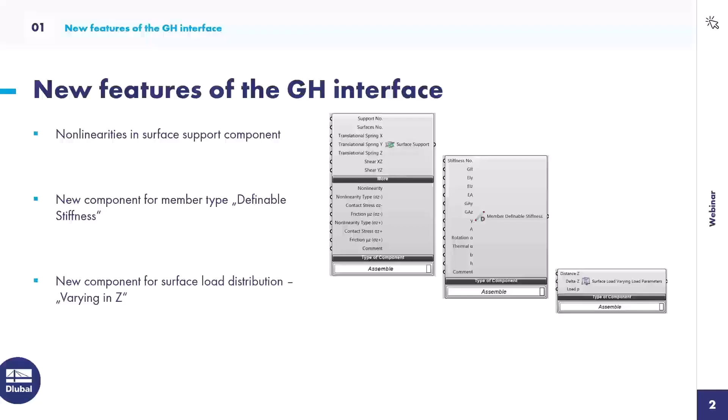The third component is a link to the surface load component. We extended it with load distribution varying in the Z direction, so in case you have to apply a hydrostatic pressure on a vessel, that's the load you can use, because you can insert varying forces in the global Z direction. We also created a new component for rigid links. All of these features were wishes from customers, so we tried to cover them as well as possible.

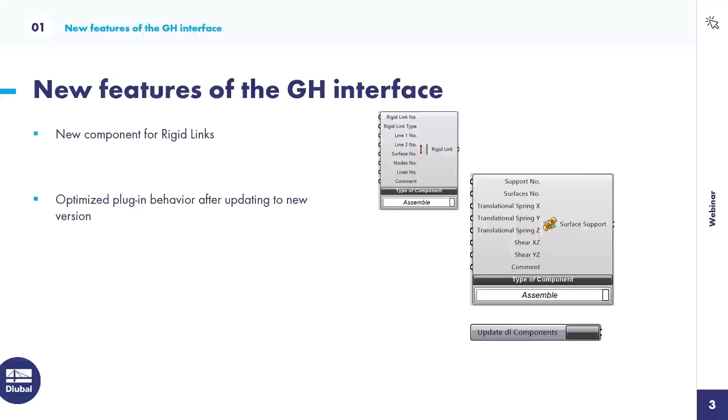The last feature, in my opinion the biggest one and the one I'm personally looking forward to, is an optimized plugin behavior when a new version of the plugin has been installed. This relates to the fact that when you opened an old Grasshopper project with a newer plugin version, it could happen that the connection wires were disconnected, at least for some components. That was caused by the fact that we constantly extend current components and create new ones, and when we extend an existing component, those wires could become disconnected - this new optimized behavior should prevent that.

You get an old tag, you get the previous component shown, you have a new component where you can run an update of the components, and still the wires should remain intact. So that's a good feature for such cases. All right, this will all come in the next days.

Now let's hop into these sample files. Let me introduce them briefly. As I said, we offer those sample files as downloads on the webinar page, so you can download them and use them yourself.

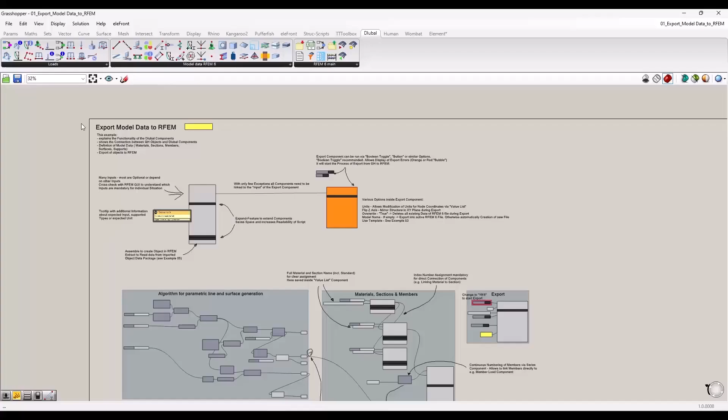As I said, I'm going to start with the export of model data to RFEM. Maybe before we dig into that, a brief introduction of the plugin itself for those who haven't seen it before. You can download our plugin via the Rhino Package Manager. And after the installation, you get a new tab here, the Dlubal tab.

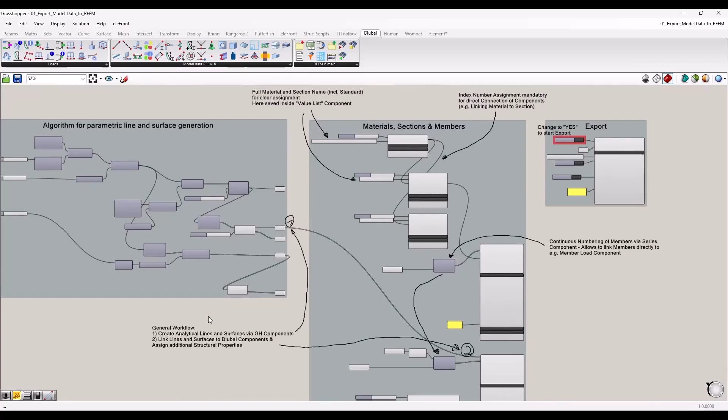And this one is divided into three chapters: the model data components, load data components, and general components. I will focus now on the center group here in this example, and start a little bit with the explanation of how our components are set up, and then also with an example so you can check it, modify it, and so on.

Regarding the introduction of our components, I left some comments in here. In general, our components work similar to other components that you know from Grasshopper. We have inputs, we have outputs, usually just one, depending how you use them.

It depends a bit on your use case, what inputs you have to fill. I can't say you always have to use this and that input. It depends. If you plan to export a tapered member from Grasshopper to RFEM, then you need the Grasshopper line, the section distribution input, section start, and section end, for example. If you plan to export a rigid member, the member type rigid from Grasshopper to RFEM, then you only need the member type input.

So we can't say this is mandatory, this is optional. My tip is check the RFEM graphical user interface, what is requested there from you, from the user, and then fill the same inputs in Grasshopper.

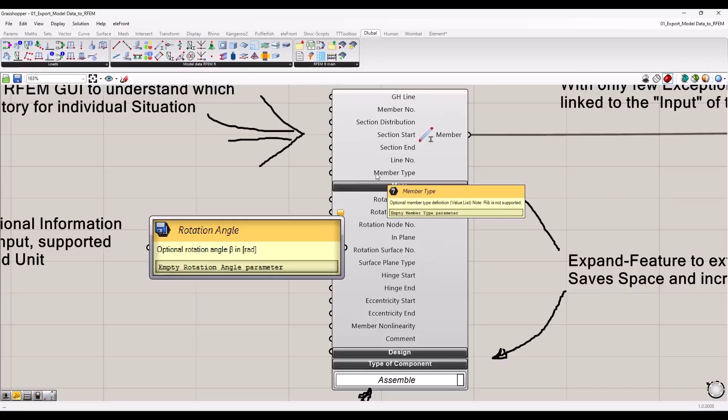We try to give you additional help via the tooltip. So whenever you hover with your mouse over an input, you get additional information. Those tooltips contain information about the expected input, supported types, expected units.

For example, for the member type, you could argue what is a member type, what's the proper input for that, a string, a value, and then you can see here value list in the tooltip. So you can call up a value list, a very often used feature for our interface, for our plugin components. It will give you the list of options, and then you can simply select the one that you need.

For the rotation angle, for example, you get an information about the unit. So also check the tooltips as a quick help if you are not sure how to deal with certain input.

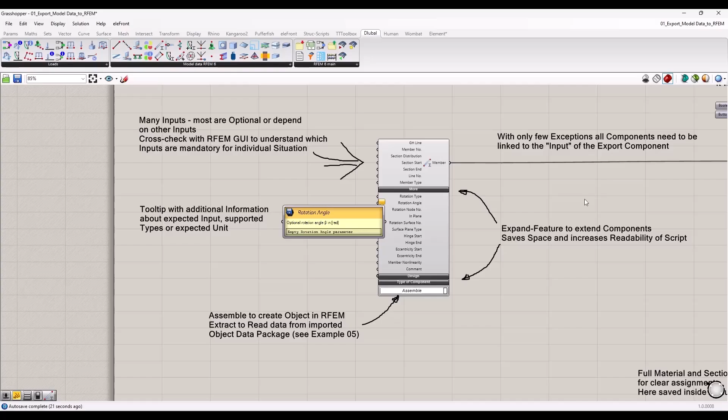We have also an expand and shrink option in our component. Here we have to say thank you to Bollinger Grohmann, Diego Apellániz. They provided us with this code. It's really appreciated and a nice feature because it reduces the space of the components if you only need some of the inputs. It's simply a nice feature.

Concerning the general setup of an export of a script that has the target to export data, you would create multiple components. I have here one for members. You would need additional components probably for sections, for materials, maybe for nodal supports. You fill them with the information, and all of those components then have to be collected inside the RFEM export component. That's this one here.

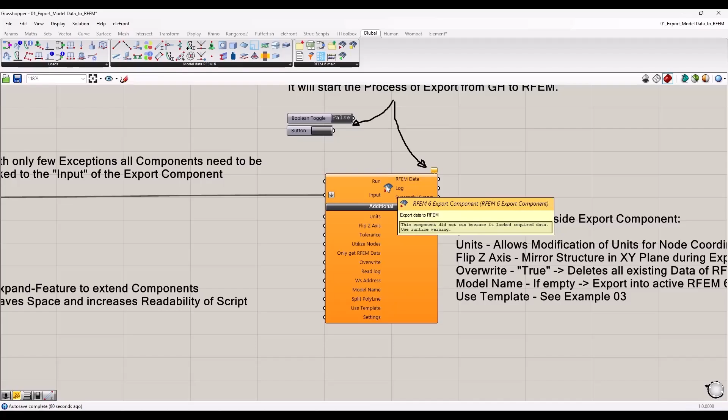All of the components are connected to the input, and then you can run the export by a Boolean toggle, a button, or similar options, which you connect to the run input. My suggestion is using Boolean toggle.

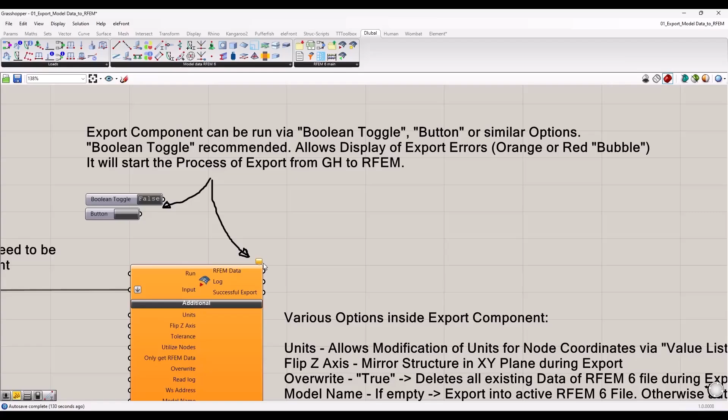It has two pros. Basically, if you keep it true when you connect it, then you have kind of a live link. So whenever you change something, the export will be triggered again, and you get the result in RFEM directly. And the other big pro is that when you made an error in the input somewhere in your script, and you leave it on true, you usually get a red or an orange bubble, as you can see here, and this one contains an error message. If you use the button, this error message will disappear in a millisecond after it showed up. So that's why I prefer Boolean toggle.

So far regarding a quick introduction of the components.

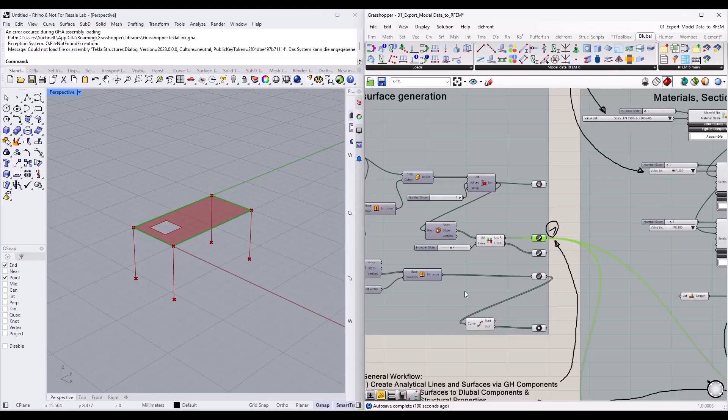Now let's take a look at this little example down here. Let me show what I did. I have here a group representing native Grasshopper components, basic components in the Grasshopper program. I created a little structure, a couple of columns, a slab with an opening, and I collect all these objects in surface, curve, and node or point components. I'll use these lines, surfaces, or objects later in my Dlubal components, and I'll show how in a second.

If you take a look at the member component, it makes sense to use the lines we created via Grasshopper as the analytical line, basically start node and end node. So what I'm doing is connecting this curve component with the member component, with the Grasshopper line input.

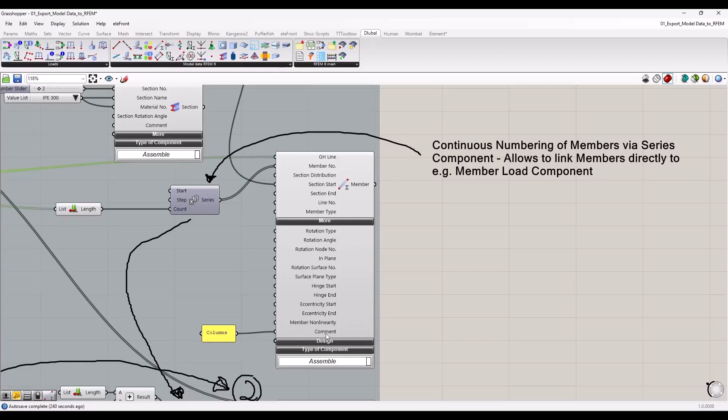Then you have additional inputs to assign the required and necessary information. What section do you want to assign onto that line? Maybe you want to assign additional comments or even eccentricities. That can be done via direct inputs or additional components.

I also create a material and a couple of sections in this example. We often get the question, will you provide a library for materials and sections as a component? We actually decided against that. The library in RFEM contains hundreds or thousands of materials and sections, so we don't see the point of having such a component in Grasshopper. It's quite easy to create your own little library.

I'm using a value list in this example. You can edit the value list - let me use this one, that's better. You fill in the short name that you want to see when you open the drop down, and then the full name expected by RFEM. The full name usually contains also the standard. If you document it that way, you have a nice little library where you can choose the materials that you frequently use.

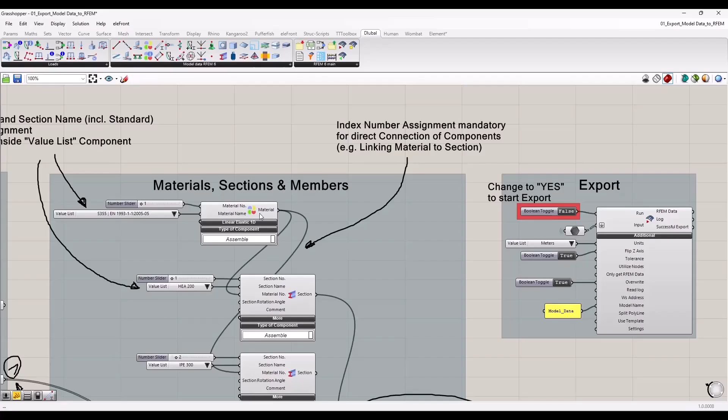Small tips like that are mentioned in these sample files. An important piece of information is also shown here. In my webinars about the Grasshopper interface, I usually connect my components directly, material into the section component, because in a section the material index number is a required input. So it's just logical to connect them.

This connection, however, only works if you assign the index number to the material, because the input expects a value 1, 2, 3, 4, 5 - the index number of the material. This information can only be shared if it's assigned beforehand. That's important - keep an eye on the index numbers of the components.

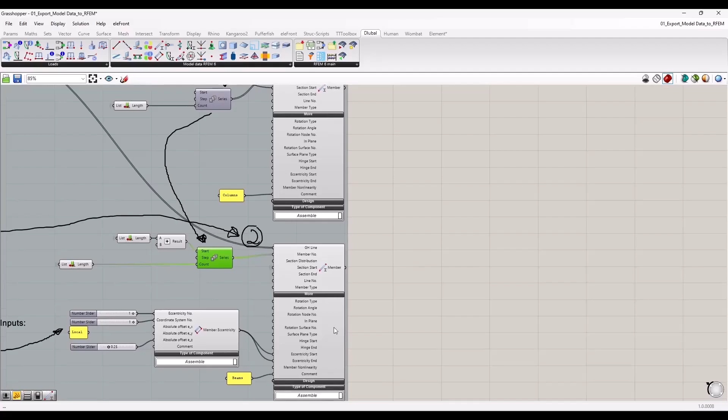It's not that difficult, even if you think about members where you have maybe hundreds or thousands of index numbers. You could use a series component, linked to another series component for additional members, to count the lines you've collected and assign numbers to them. That's quite easy.

That example also creates a couple of nodal supports, thicknesses and surfaces, with additional information on how to trigger a fixed support, for example. At the end of the example we have the export, and here highlighted in red, the button you have to press to start this whole example - as I said, a Boolean toggle.

This is what I want to show here as well. Let me quickly run the export from this little file to RFEM. I double clicked on it, and now the programs will communicate with each other, and in a second I should see the result.

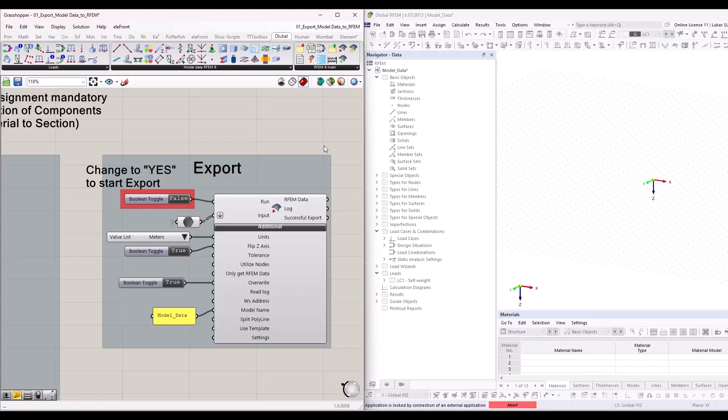Okay, here we are. I'll stop the export again, set it back to false. With that, I make sure that whenever I change something, it will not automatically trigger the export again. As you saw, it takes a couple of seconds, and you might want to modify more things before you run the export, so that's why I set it back to false. You can leave it on - that's up to you.

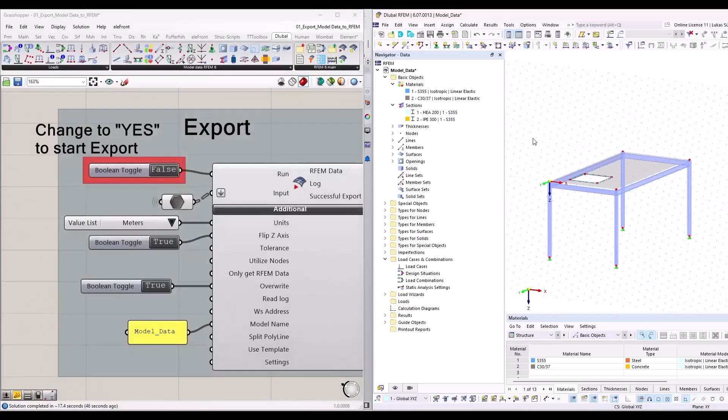As you can see, the result is clearly visible. We have the same little structure. I have eccentricities assigned on these members. As I showed before, materials, cross-section, everything has been exported correctly, along with the nodal supports. That is the first little example I wanted to show here, the export of model data from Grasshopper to RFEM.

All right. Then let's have a look at the second little sample file, which is about the loading. I could have done it in one, but I feel, if you begin with the interface, it's a little bit complex, maybe too much information on one file. Therefore, I split it up in 2 sample files. So that's the one for the loading. I will increase the size again a bit.

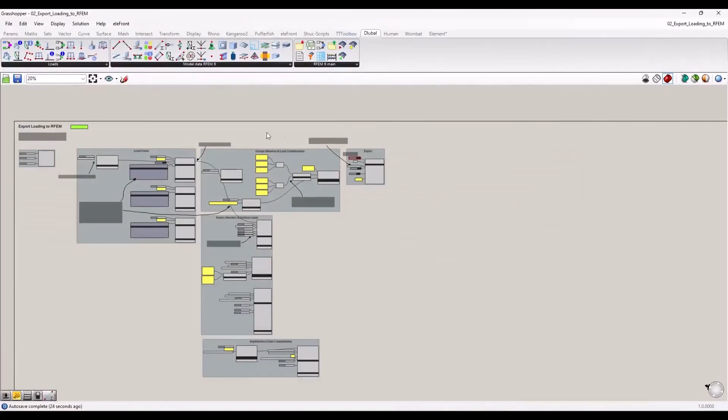And maybe as a quick introduction, what we cover here in our loading chapter: you can create load cases via the Grasshopper interface. After the load cases, you can also create load combinations and design situations. Design situation, ultimate limit state, serviceability limit state, those types which are required as an input in the load combination. And then you can export these load combinations.

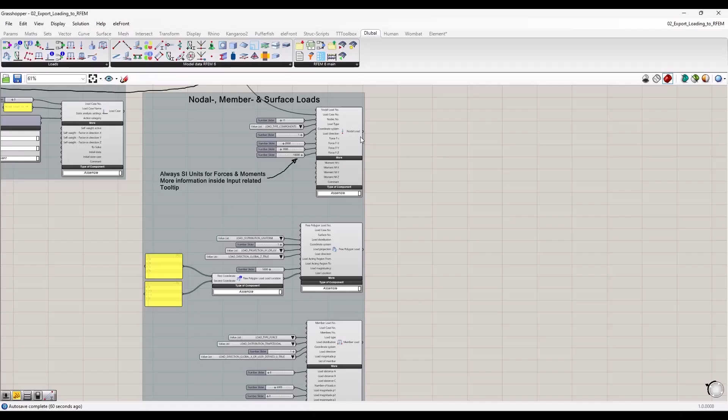Additionally, this sample file covers a couple of loads. Obviously, you want to create loads inside your load cases also in Grasshopper. I mean, probably up to you. And here we cover nodal loads, surface loads, member loads, line loads. There are more options here. I just use 3 of them in this little file.

And on the bottom, also a topic which should not be dismissed, imperfection cases and imperfections. Initial sway on columns, pre-camber. Depending how you plan to run the stability analysis in RFEM 6, this might be necessary, and you can create it via this plugin.

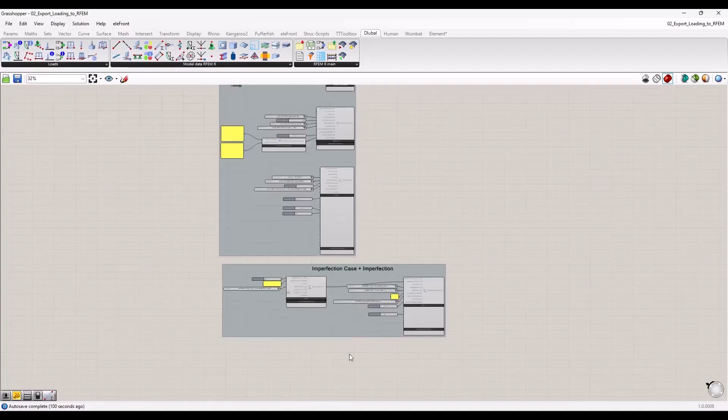So let's have a brief look at the sample file as well. Actually, this second sample file is an extension of the first one. As I said, I wanted to focus only on the load related data or info objects. The rest is still part of this script. It's however hidden in that cluster. So if you double click on that icon, you see that behind that cluster, we have basically the content of the first sample file. All right.

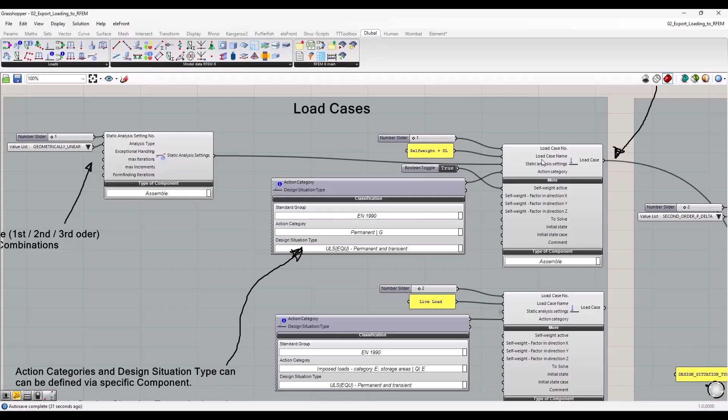Regarding the load cases, I think it's clear that we can create them via Grasshopper. Important information is the static analysis setting. Should it be analyzed according to first order, second order, and so on? That's an additional component. It is shown here how you can treat it and handle it.

Another important input for load cases is the action category. Basically, is it a permanent load case? Is it a live load? In case of a live load, according to Eurocode, is it a group A, B, C, D, E live load case? There are different options that you can select via this classification component.

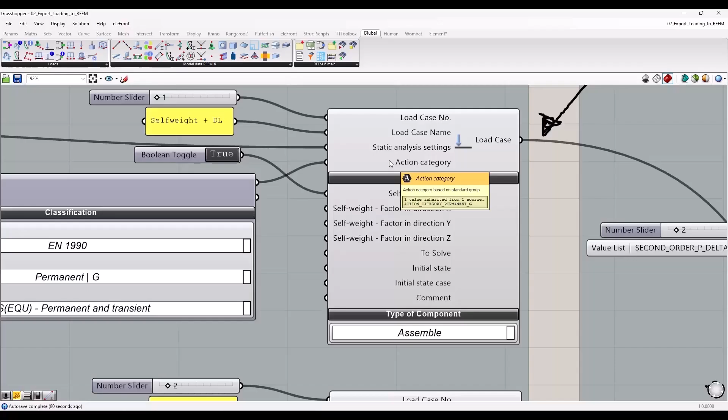It's like a little library, because the expected input for the action category is a relatively complex string text. You can see it here in the tooltip, action category permanent G. That is nothing which you know directly. You don't know how to input that. That's why we create these strings via this component. This is how I set up load cases. I fill these load cases with loads, as I showed before.

Here, maybe as a comment, any value that you have to input into our components usually is related to the SI units. So meters, Newton, as a simple example, most common stuff. You cannot change these units into anything else. So this transformation can be done via a little recalculation if it's required.

You can easily use a multiplication component, assign the proper factor to convert a pound force into a kilonewton related unit, or SI related unit. So that can be done in Grasshopper, and here as an information we always expect the SI units. I documented it again in the tooltip, as you can see here, Newton, or for moments Newton meter. That's also why I'm using high values here, 2000 Newton for 2 kilonewton.

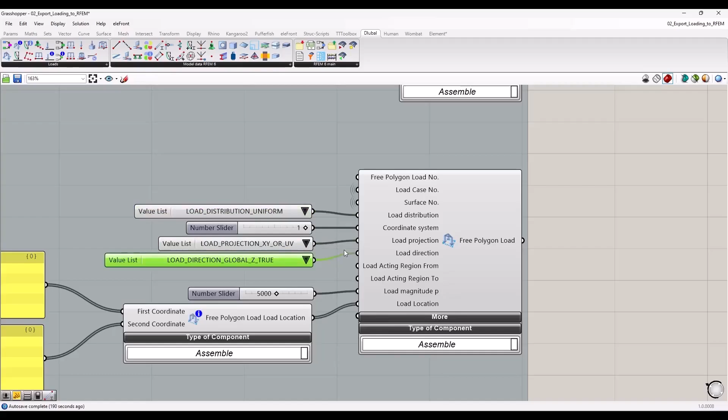Also obvious, I hope at least, if you deal with the load components, we use a lot of value lists here to define the proper load. There are various ways how to create a load, and most of these inputs can be defined via value lists. All right, so far regarding the loads.

The load combinations can be built manually via our plugin. This component is basically divided into subcomponents. We have the general load combination component.

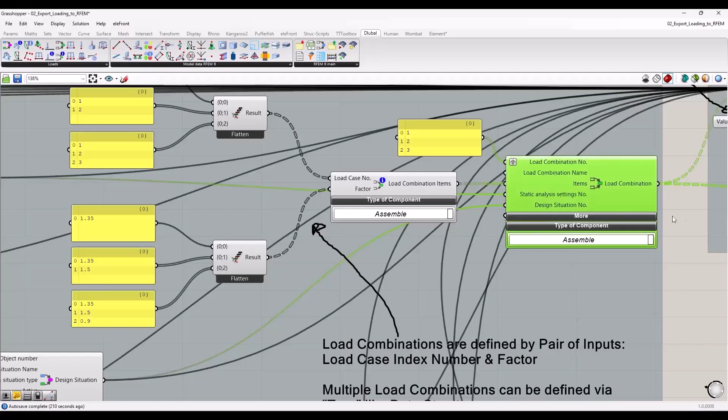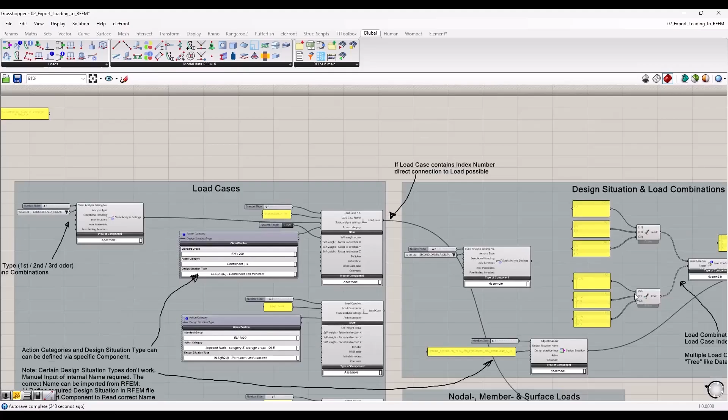Here you can assign the static analysis setting, you can assign a name, you can assign the numbering, more settings as well. The actual combination will be done in a second component, the load combination items component. Here you combine the load case index number, so load case 1, load case 2, 3, depending which numbers you assigned to your load cases, with the factor, 1.35, 1.5, 0.9, whatever is needed. And this combination then can be done via little lists.

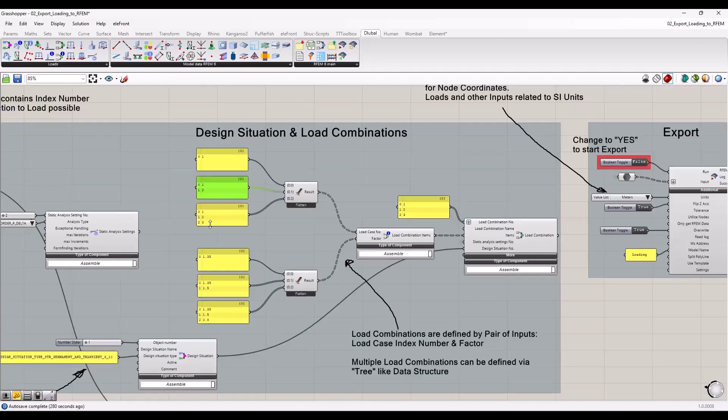So the first load combination that usually comes to mind is the dead loads multiplied by a factor. That's basically load case number 1 multiplied, based on the Eurocode, let's say, with the factor 1.35. Next combination is dead loads plus live loads: dead load case number, live load case index number, 1.35, 1.5. So that's how you can set up multiple load combinations via Grasshopper.

And if you have all that, you can connect it again to our export component. Same logic. Here I used a little data component in front simply because, to connect these components, sometimes you have to zoom out and then draw these lines from here to here. So what I do is I have this little data component, which I move to the place where I need it, and then have an easier connection. That's all about it. It's not required to do it that way.

Let me also show that export. Again, we run the export by double-clicking on the Boolean toggle. Wait a second. All right, export is done. Let's have a look. Same structure.

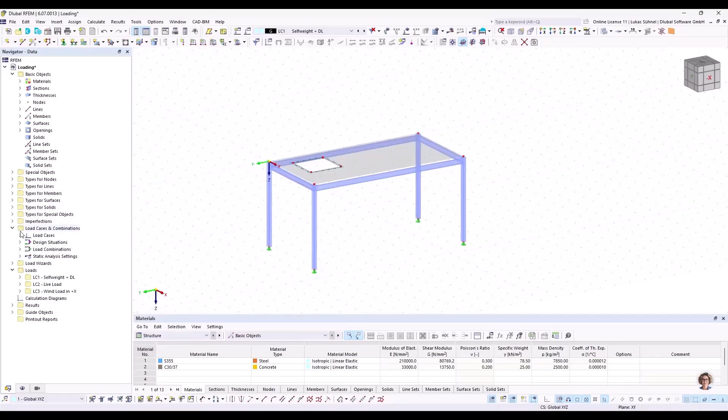That was all part of this cluster file. New are the load cases, the design situation, the load combination. This all has been created via Grasshopper. Also the imperfections, as we see here, or the loads, node load, surface load, and also wind load as an example. All right. So far regarding the second sample file. Now let's have a look at the third one.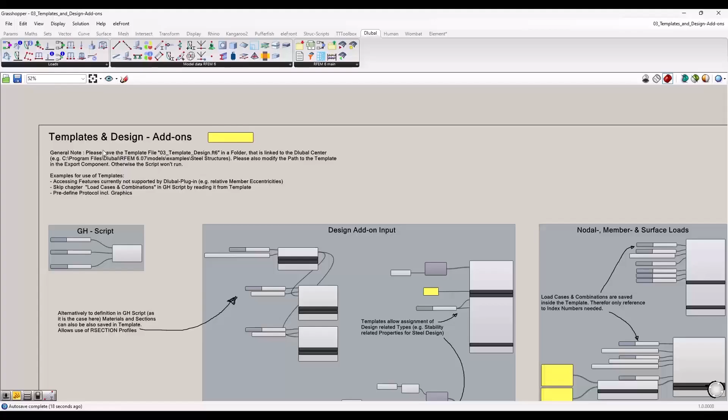The third one is about using templates and how to control the design add-ons. First sample file, how you can export model data. Second sample file, how to export loadings. I think it's quite clear what we can do in general, what features we cover here. Now, templates is a completely additional topic, I would say. It's really a strong feature which you may or may not know from RFEM 6 or previous versions. Let me show it maybe in advance.

Think of the following example. You analyze or design the same kind of structure again and again. So maybe you have the same kind of load combinations, or your protocol always looks the same, the same graphics are included and so on. Then you don't have to do it every time from scratch. You could use a so-called template.

You create such a file once, so you would create a new RFEM file where you define all these settings and properties that you want to save in such a template file. Then you save it as a template, and whenever you create a new file afterwards, you can refer to that template. So basically you create an empty file into which the information from that template file will be imported. And let me show that as well.

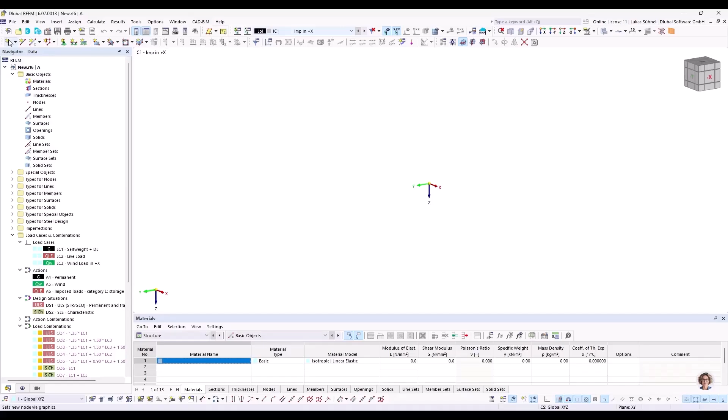Little spoiler, it contains graphics as well. So yeah, that is a feature that we can use manually in the RFEM graphical user interface. And we have also access to that via Grasshopper. Creating such a template is manual work in RFEM, but once you saved it, you can also use it in Grasshopper.

You basically just link to our export component the path to that template in the use template input. That's all you have to do. Then the template will be preloaded into the file that you create with your normal export. And one thing that is quite important for that workflow, you should not use overwrite during the export. That would overwrite the data that we import with the template. That is basically nonsense in that moment. So therefore, make sure to set it to false.

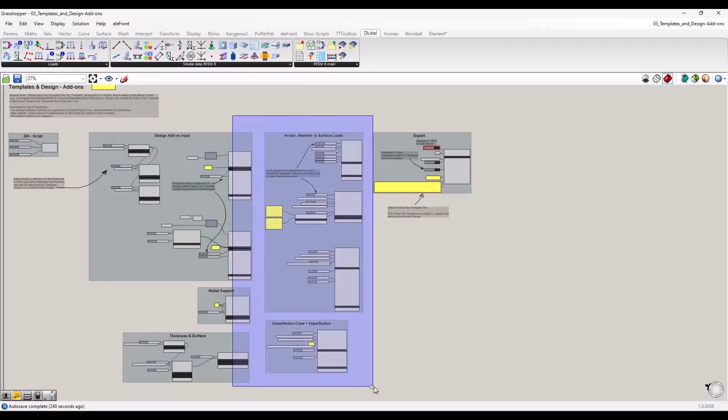And then you can use those types, the information that you have in the template, in your Grasshopper code. And how can you use that? Well, let's go back to the example with the load cases and combinations. Let's say you don't want to create these load combinations manually in Grasshopper, as I showed before. This whole chapter is missing here in that example. I have here some model data and some loads, but the load cases and combinations have been skipped. It's part of this template file.

And if I create now a new load, a node load, a member load, whatsoever, I need as an input the load case index number. Load case 1, 2, 3, 4. So all you have to do is assign the index number of the load case this load should be placed into. Obviously, this requires the knowledge of what load case is what index number, but that is okay, I guess.

Where else could it help to use templates? They can also help you to access features that you cannot control via the Grasshopper plugin. For example, currently our member eccentricity component allows only to generate eccentricities with absolute values. In RFEM itself, I can quickly open a file, just a second, we have additional options. We can define eccentricities relative. We could say the eccentricity should always be the distance between the center of gravity and the top flange or something like that. Let me show that in a second.

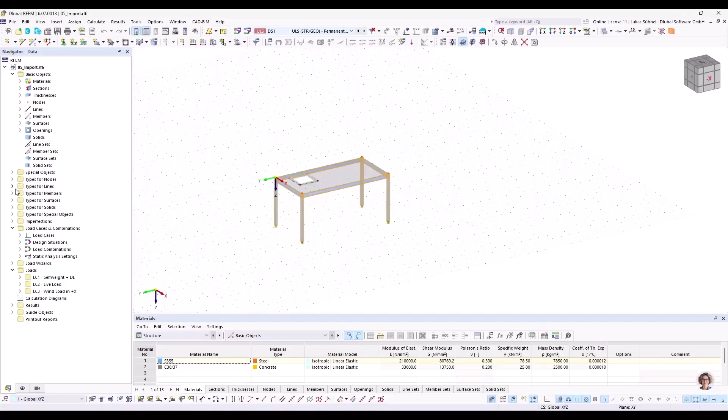Okay, if we think about member eccentricities, then instead of just the absolute values, I have additional options in RFEM. I could, for example, say, please create an eccentricity which is relative. So depending on the cross-section size, it will always take half the height as an eccentricity. And I can save these eccentricity types inside my template and then use them in Grasshopper. So instead of creating the eccentricity manually and assigning it to the member component, I could just assign the index number 2, which is the relative eccentricity, to my member component. So the templates also allow me to use features that are not covered by our current plugin.

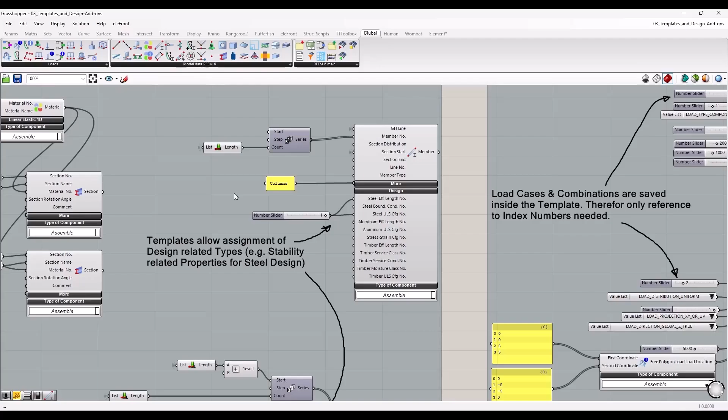Just another example, you could skip the whole generation of materials and cross sections. You can save them in a template and just assign the index number into the section inputs of the member, for example. And the last feature that I want to mention is the control of the design properties. Let me show that maybe again in RFEM.

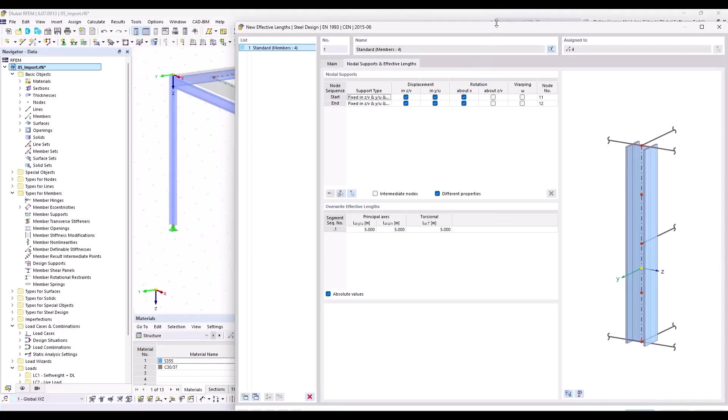Let's imagine we want to run the steel design in RFEM afterwards. For the steel design, we have to define additional properties. What's the buckling length of the column? That's a property inside the member dialog, design types. Here I can say perform flexural buckling, lateral torsional buckling, and so on, all these checks. And then use as a buckling length, maybe length XYZ, 5 meters. These inputs are relatively complex for a Grasshopper component.

And as a quick solution, until we have them as a component itself, we thought of the following. You could create these types in advance in RFEM. You could create an effective length type for a single span beam, support at the start and at the end, which is probably covering 70% of the cases. Then you could create a couple of additional types, maybe one with an intermediate support in Y direction, maybe with 2, 3, 4 intermediate supports. So you could create multiple types, save them in the template, and then use them as input in Grasshopper.

Same logic. In my template that I have used here, which is also provided in the download folder, I have multiple types. I have effective length type 1, which is a single span beam, I think, and steel ultimate limit state configuration.

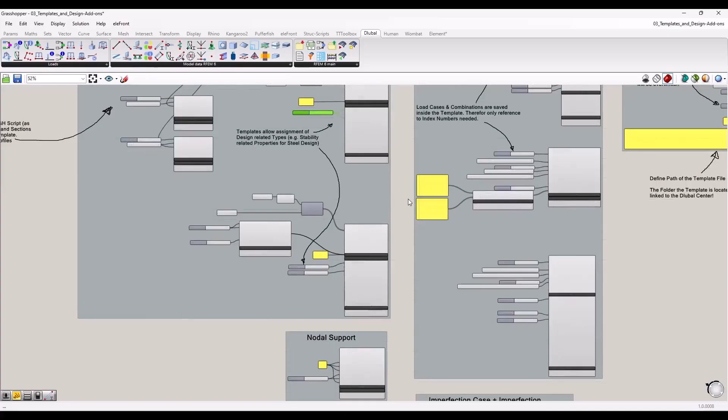In both cases, for those members, I want to use type number 1. Here I switched it up. I used the second ultimate limit state for configuration in this second group of members. So that is how you can assign already design-related information inside Grasshopper. And then you save again time in RFEM. Yeah, that's the purpose of that.

Yeah, that is, in my opinion, what speaks for using templates. Additionally, this part with the protocol, which you can also save inside the template. So you can skip the generation of that manually in RFEM. It can already be imported via the template. And now let me show what I did here.

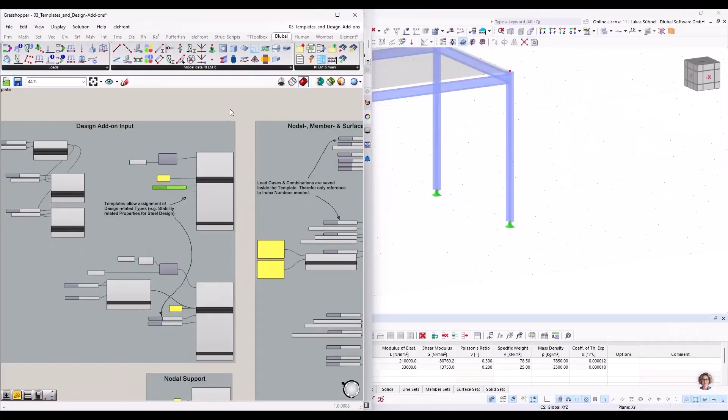So I will close again the RFEM file that I have. Put it to the right hand side, run the export, and I'm basically creating the same file that I had before in sample file 2. I just skipped the whole load combination part and load cases part. Yeah, that is part of the template. And yeah, I also have a protocol included in here.

Let's wait for the result. It's a bit slower due to this webinar software. All right, now it should be finished.

Okay, so we see again, same structure. This time, however, with, let's say, more load combinations, the ones that I saved in the template file. And then again, I was able to use these load cases for my loads. I assigned all of this information anyhow in Grasshopper. Additionally, I have assigned steel design related information onto my members.

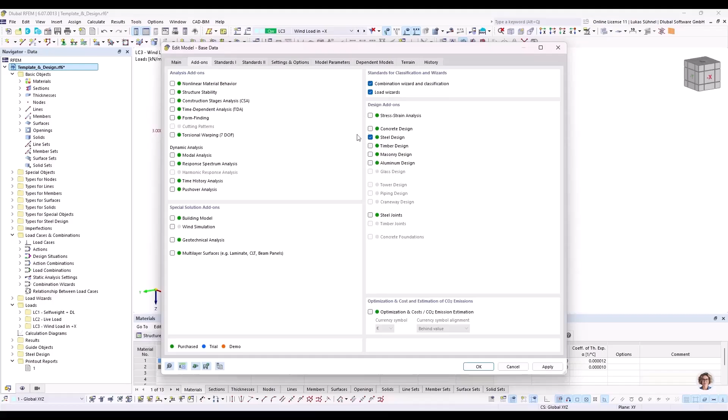So first of all, inside the template, I was able to save also which add-ons should be activated. We also have no control about that in Grasshopper currently. There's no component where I can say, please activate steel design. This is information that has been saved in the template, as well as the information what code should be used, what national annex.

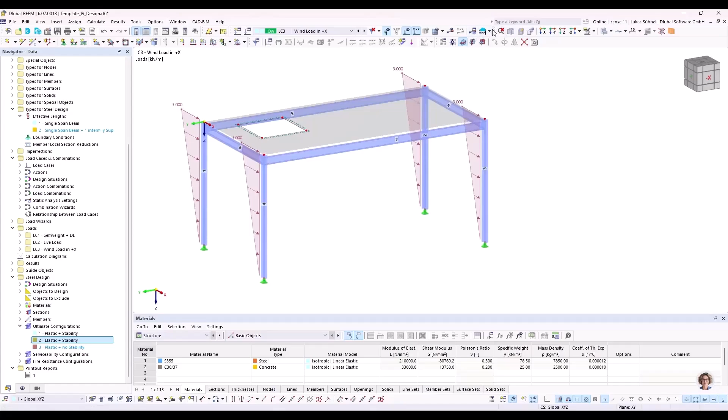And then additionally, as I said before, I created a couple of effective length types. I used only the first one, I think, probably on those members. Single span beam type has been assigned directly via the plugin, and also design configurations, which we can find down here. I created multiple in my template, and I'm using plastic and stability analysis, elastic and stability analysis, so various types that I assigned via Grasshopper. And then I can run the analysis. Let's quickly do that.

There was also an option while it's calculating. There are two options: calculate locally and calculate in cloud. And that's kind of a new feature. So when you have big files which require a lot of power, then an alternative way could be to send the calculation file into the cloud. There are different PCs with different amounts of cores that you could use. And then it will give you information when the calculation finished, so you can download the file with results again.

And in the meantime, you can work on something else while it's calculated in the cloud. If you do it locally, your PC might be very slow due to the multi-core use of the calculation. So just as a side information here while we were waiting for the results.

Okay, so the file's calculated. What I wanted to show is that since we were able to define all this information in Grasshopper already, I have now also results for my steel design ready here. And all I had to do is run the calculation in RFEM after the export. And I have my results ready here, as well as the protocol, which I mentioned a couple of times now that I saved in the template.

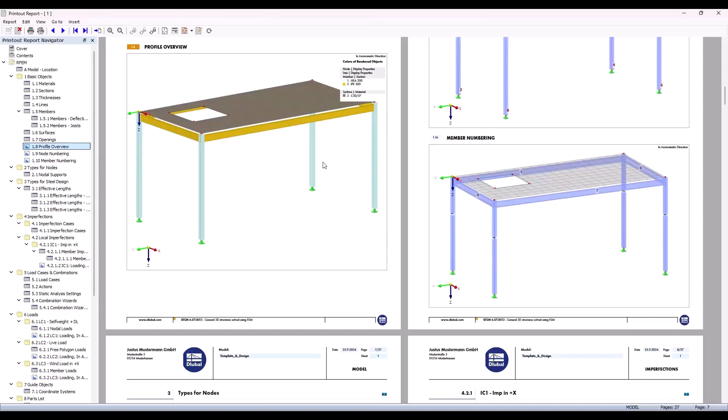So here, these are all graphics, for example, that I included in the template, and I have them already here without a manual modification. Load case related graphics, and even one for the design result. So templates in general for RFEM could be a big help for designing the same kind of structures again and again, or in the daily work in general. And it's also a big benefit for the Grasshopper interface as well. Okay. So far regarding that.

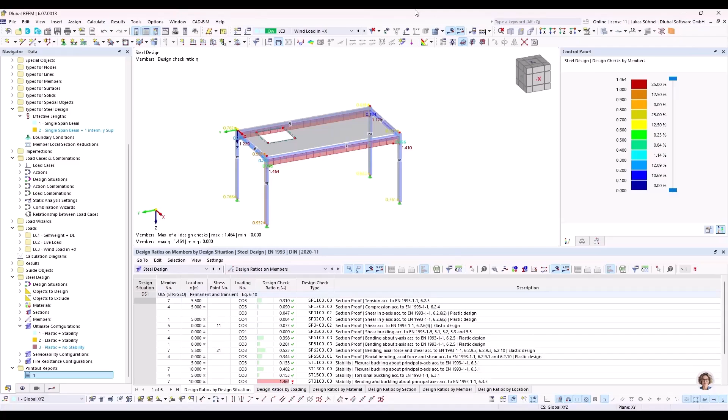Let me go to the next sample file, number 4, which is about anything, as I said, that comes after the usual export. You create model data with Grasshopper or RFEM, then you create load cases, the combinations, you define the loading, and the next step usually is to deal with the mesh, mesh settings, and then you run the calculation, then you somehow deal with results, and this will be covered in here.

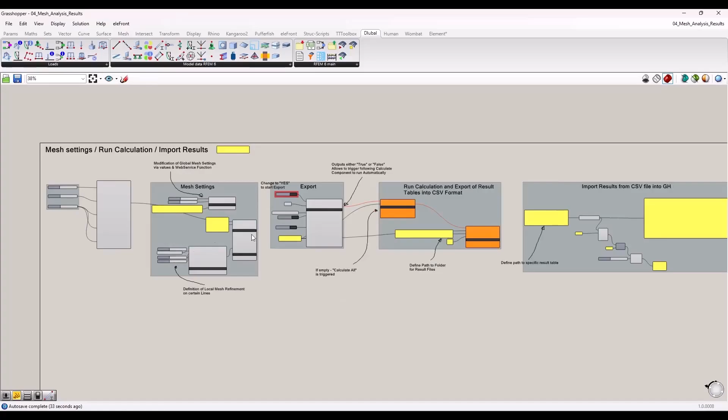Different groups here. Again, it is built up on the previous example. You can see here that that's the code for the model data, for the load data, and so on. I wanted to set the focus on these additional topics. So the first one is about the mesh settings. We have here, for example, a component for the global mesh settings. What should be the target length of the finite element in general, and so on.

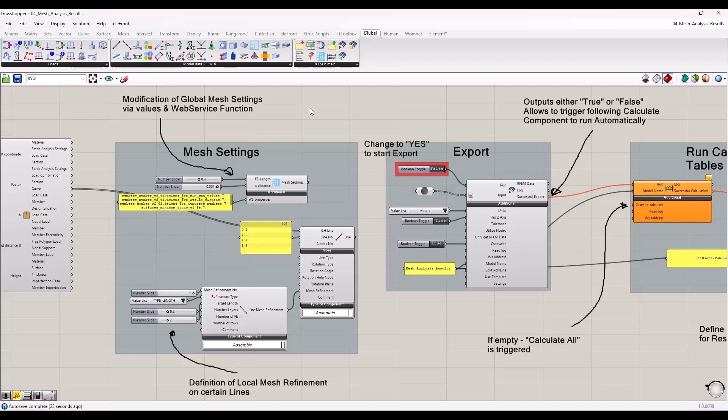And then we have additional components here represented by the line mesh refinement to refine the mesh on specific objects. For example, on certain lines, but we could also assign a nodal mesh refinement or a surface mesh refinement. So various options how you can manipulate the mesh via Grasshopper. And then the next step would be obviously to calculate that structure. Again, all these components should be connected with the export. And then you can run the export to RFEM and you have a proper mesh, which is nice.

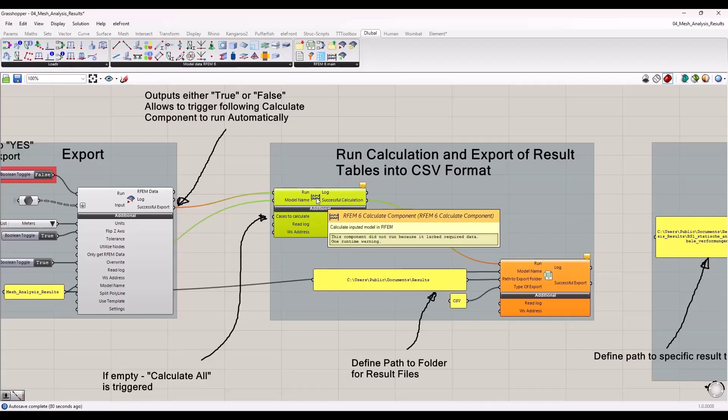But before we do that, I want to cover also the next steps. Instead of running the calculation manually, as I showed it before, you can trigger the calculation also via a calculate component. Here you can decide if you want to analyze only specific cases, just specific load cases or combinations, or if you leave that input empty, then calculate all as a function is triggered in RFEM.

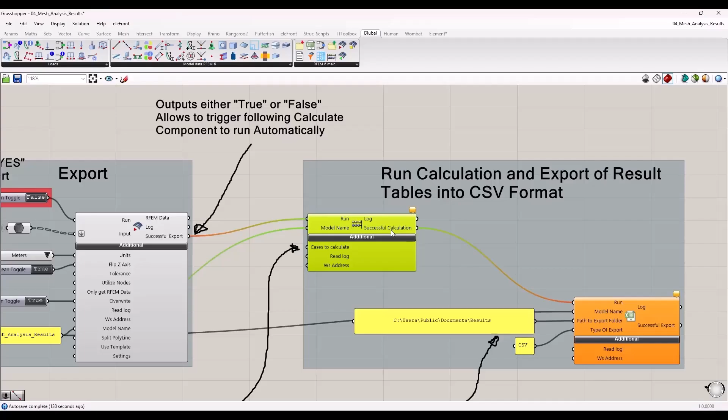After the calculation, or no, how does it work? That's maybe worth mentioning. It is kind of like a stepwise export. We start with the regular export of the model data, load data, and mesh information. Whenever this export is ready, it will give us a Boolean parameter, a true. It will output here true, and with this true information, I can run the calculate component. And when the calculation is finished, I get again a true output here, and with this I start the export of the results.

That's another component part of this chapter here. Here I can export my results into CSV or XML files. That's the option here. And you only have to specify the location of the folder you want to have the results in. When the export is finished, you can read the content of these files. This is, however, pure Grasshopper components, so this is not specific to RFEM. That's a read file component from Grasshopper, and then just some data handling to get maybe one specific value out of that whole file.

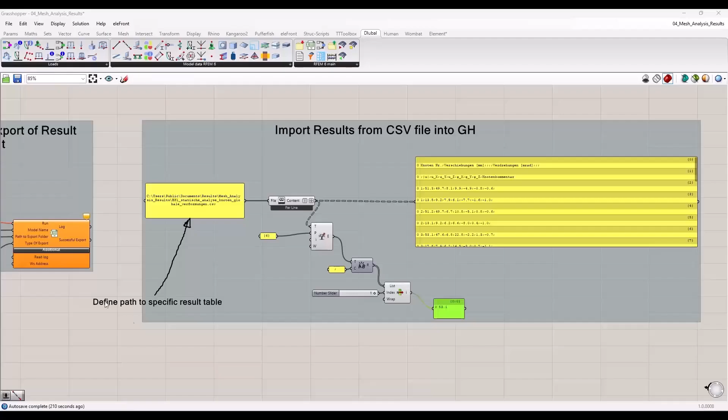That's possible. And to show it, I quickly want to remove the existing results, which I forgot to do, because that should be empty here now. It will be like that in a second. Just let me delete the folder. So if I run it again, wait, why is it? Public results. Oh yeah, sorry. Public results. Now it should be empty in a second. Okay, I just deleted the existing results. And now you can see that, of course, this script is failing. There is no such file.

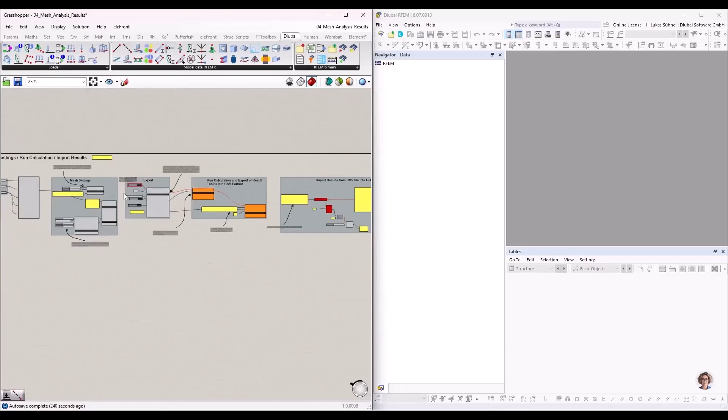And I want to show the process now live. Therefore, again, I will run the export first. And this is now a stepwise export. You can see that on the bottom of RFEM. It will run the export of the model data, load data, and so on. Then it will make a little pause. Now it's running. Then there's like a pause. Then after that pause, it's starting to run the calculation. You can see that mesh generation and calculation in a second, without the dialog, by the way. You don't get the dialog if you start the calculation externally. And then again, a pause to export the results.

That's how it's done currently. And currently, we also export all result tables; that can also be controlled inside a template. You can select which result tables should be generated, so you don't have to deal with all the result tables always. So now the export is done. I can cancel this whole process. And what I have to do is, because this is the English webinar today, my tables are named slightly differently. So I will change the name of that path here.

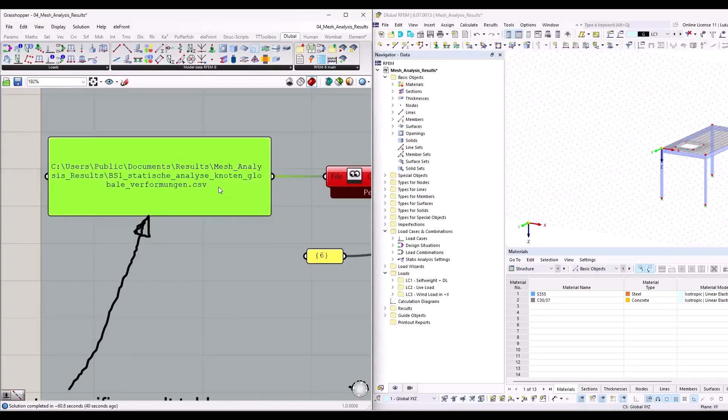So I can show it. These are the CSV files we received after the export, and I can use, for example, copy this one, replace it here. Oh, that's working correctly. Yeah, looks good.

And then I have here the results, the global deformation on nodes as a result table in Grasshopper. With a bit of filtering, I get the maximum nodal deformation.

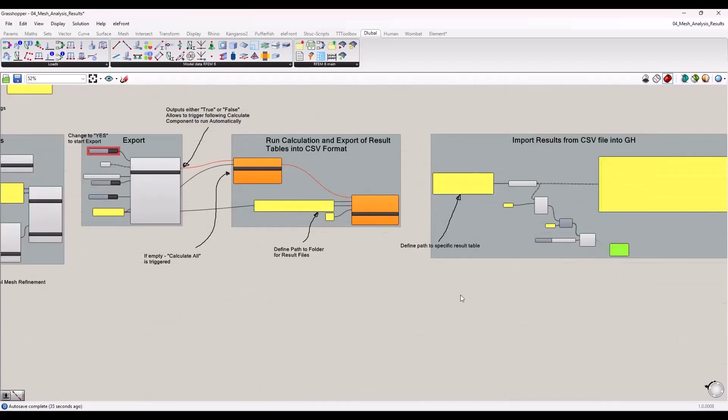That is the fourth sample file. You could think about additional features now. You might say, okay, if I have a result in Grasshopper, I could maybe use additional plugins like Galapagos to run calculation loops. I showed that in a different webinar briefly, but it's also possible. So you could say this is the target value which you want to optimize. You want to reduce the deformation, and as a manipulation, it should manipulate the height of the structure, the length, whatever, and then it could run automatic calculation loops. Just as an idea.

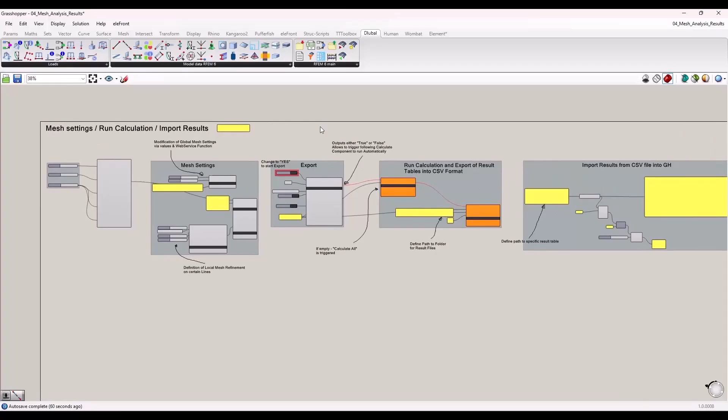Okay, so far regarding the fourth example. Let me close everything again.

And then we turn the way around a bit. Now I open a file in RFEM 6 in advance, and I will open also the fifth sample file. This one is about importing data from RFEM into Grasshopper, so the other direction is also possible.

Instead of the export component, you have also an import component. With the import component, you can read information from RFEM into Grasshopper. Let me double check, still waiting for the file to be opened.

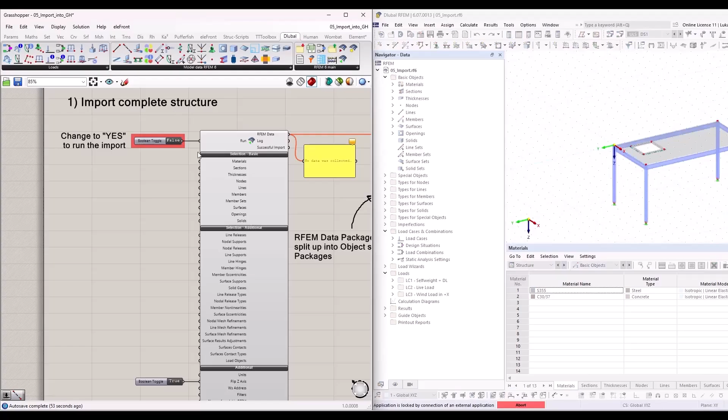Okay, so let me put that on the right-hand side. It's the file that we created before, that on the left-hand side. Basically we can import, or run the import again via a Boolean toggle. Here it's required to use a Boolean toggle because it has to stay active.

So I imported my data and I get an RFEM data package. That doesn't help me at all in the beginning, so I split that global data package up into object-specific packages with this RFEM data component. I still have unreadable data packages, so-called GH objects or containers.

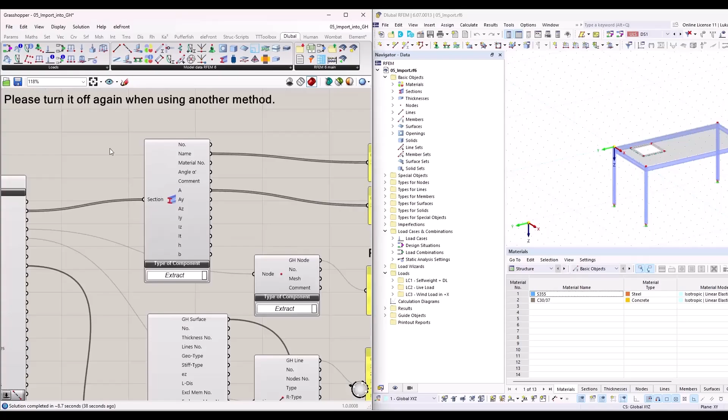I can read the information from the section package via my section component, and this is the same component that we used for creating a section. That's the component for creating a section, and I can switch it around from assemble to extract, and then it's the same component. So it basically mirrors the inputs and the outputs.

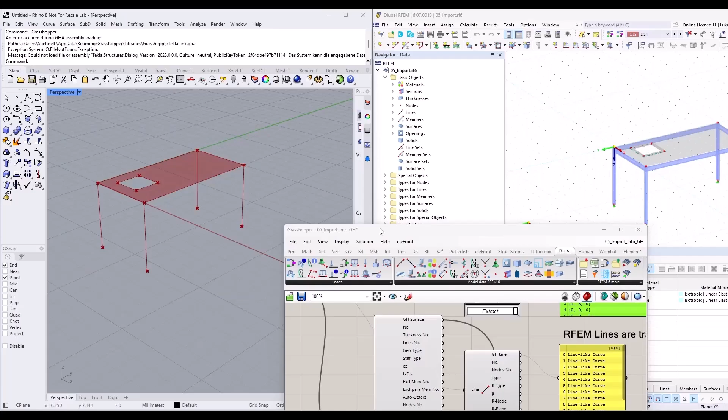Then you get the results you expect, the names of the sections, maybe here the area of the sections in square meter, SI units always. For nodes and lines, you get also real Grasshopper nodes, real Grasshopper lines, and also surfaces. So what you can see now in the viewer of Rhino, I basically imported the analytical lines and surfaces from RFEM into Rhino or Grasshopper. You can bake them and use them somehow if you want, for example. So far regarding that.

We can modify the import a bit, because now I imported everything in big files. That is maybe performance-wise questionable if you want to import everything, depends what you plan to do with that. You can also import only specific objects, using Boolean toggles to tell the import component to import only nodes and lines and skip the rest. Then the import is much quicker because it only has to read a couple of pieces of information, not all of them.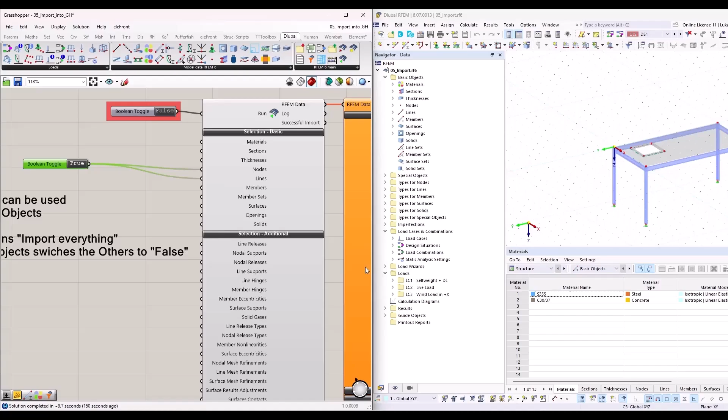So as soon as you assign a true command to any of those inputs, it will only import that, and the rest will be set to false. If you leave it empty, everything will be imported. That's the logic here, and then again we split the information up. Let me quickly show that. We see we imported the nodes again, the lines again, but I skipped the surfaces this time. We can also see that other information won't be shown, like sections, because I simply did not import them. All right, then we also have filter options.

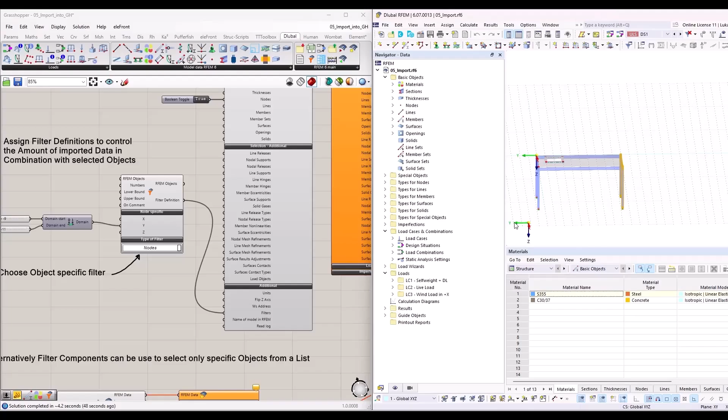I can use filters before or after the import. Here's a filter component that lets me specify in more detail what I want to import. Again I want to import only nodes, but not all of them—just the nodes on the negative y direction side. So I use the filter to switch between types and say: import the nodes with y coordinate between -9 and -11. If I do so, I should get only 4 nodes after the import.

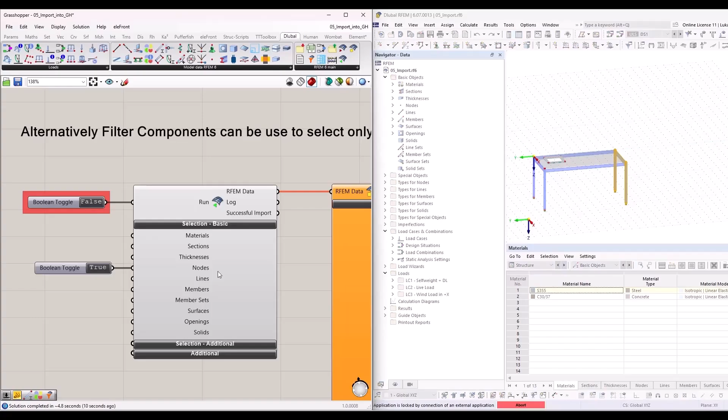As I said, you can also use filters afterward. Let me run the import here: same example, I import all the nodes—really all of them—but then I want to split up the data package. Say I have a couple of branches and need those same 4 nodes from -9 to -11 for something else, maybe to create a surface, and then use other nodes with the filter component for something else. So with these filters you can sort the imported data afterward, and if you place the filter in front with the filter definition, you can control the amount of imported data.

So that is the import from RFEM into Grasshopper.

When would you need that? An example: a checking engineer explained to me in a call that he thinks about using Grasshopper as a converting tool. Checking engineers deal with different structural programs—they have the task to design the same structure in a different structural analysis program and convert the data. His idea was to create a tool in Grasshopper, since usually all programs have Grasshopper plugins.

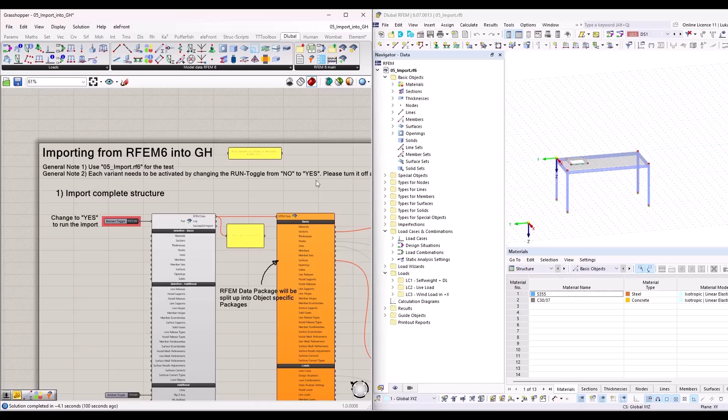As an example, he's getting the structural analysis from the structure engineer in Dlubal. Then he imports the information from RFEM into Grasshopper, extracts all the necessary information, and connects it to, say, the Sofistik or SCIA plugin to generate the Sofistik or SCIA model based on the RFEM model. That's one idea—you may have others as well. We offer this feature and are interested to see what our customers do with it.

Example 6, and now the last example, and then we are already done for today. Actually, I can leave the file open.

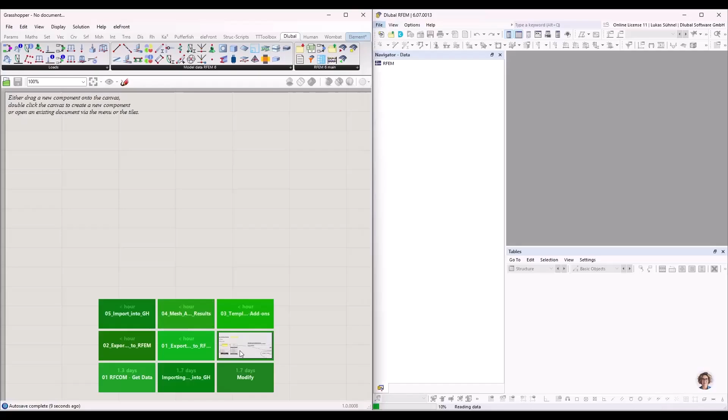The last example is about the modification of an active RFEM 6 file. Imagine you have a structure created in RFEM, and for some reason you want to modify certain parts of it, maybe parametrically—that's why you use Grasshopper. I have a little sample file covering two tasks. The first task is to modify these two members, member number 5 and member number 7: we want to assign hinges at the ends because they're connected to the web of the column. The second task will be to move an opening. Let me show how that can be done.

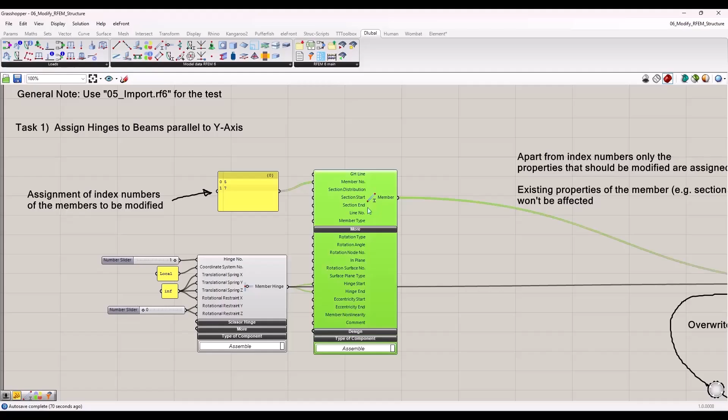We have to use a member component for this case, because I want to modify my member. I tell the member component to apply my changes to index number 5 and 7—I want to modify member number 5 and member number 7. Then I only apply the changes I want, in this case extending them with a member hinge on both sides. It's not required to define all the other information again, like the section or the eccentricity assigned to these members—you only assign what you want to modify or add.

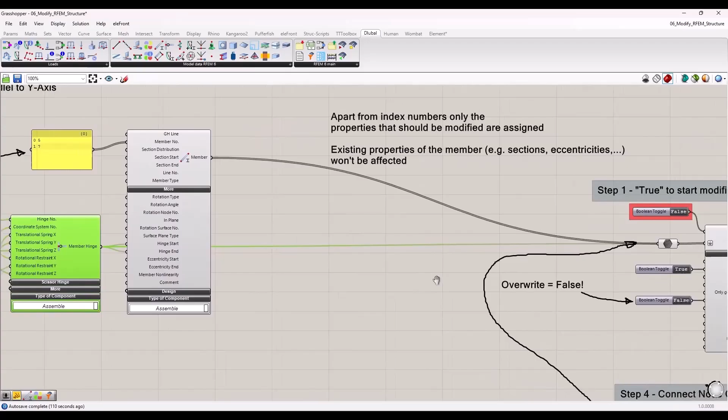Then you connect the component again with the export component. Here you make sure to use overwrite and set overwrite to false—if you set it to true, your structure would be overwritten during the export, which isn't ideal. Set that to false, and that's all you need to do. That is starting a modification in RFEM, and I can show that as well.

So now it's writing these hinges to the members, as you can see. The rest is still the same member, it has the same section, the eccentricities, everything is untouched. It just added the hinges here. That is task 1.

Task 2 should be to move the opening parametrically through the slab. How can we do that? Well, there are various ways. I want to basically read the coordinates from RFEM into Grasshopper and then modify them.

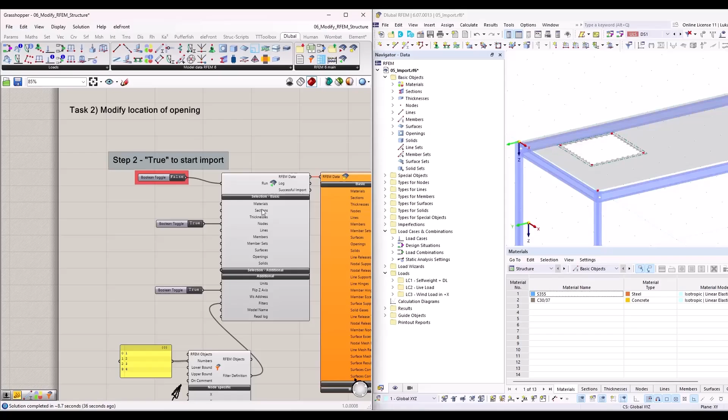To do so, I use the import component in a similar way as I did it before, in example 5. Import component, just the nodes, and again only the 4 nodes from the opening. I don't care about the others here, so that's why I'm using a filter.

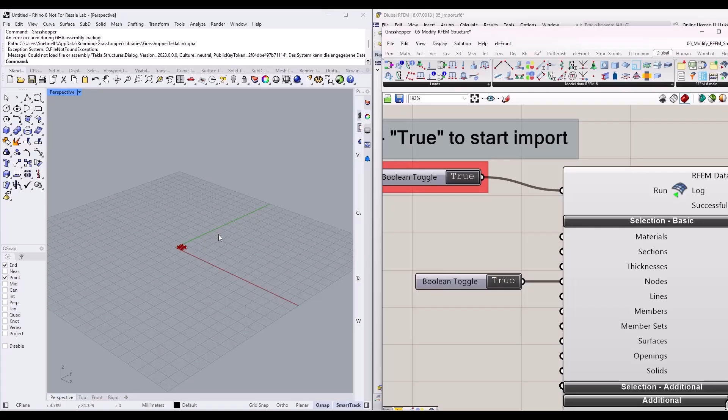Then I split the data package up into the nodes. I extract the Grasshopper nodes, we can see that here. Oh no, I didn't run the import. Just a second, now I run the import. Okay, so those are the 4 nodes that I just imported.

And then I basically modify them. In my case, I move them with the MD slider, so I can easily move them around to the expected new location. And then I use again a node component to which I assign the index numbers of the nodes that I want to modify. Actually, I could have connected that panel to this component too. I somehow copied it, but it's the same content.

And then the Grasshopper node input with the nodes I just copied, with the move component. So basically, I tell my component the new location of those 4 nodes comes from Grasshopper, from that component. Then I need to connect that as well to the export, it's not connected yet.

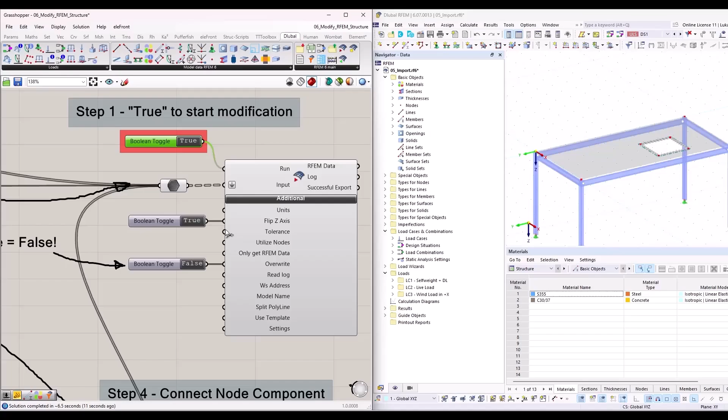And can I move it? No, I hope we can see it live. Then it will automatically run. Yeah, it's already done. It will, because I left the export open, basically. It started the export directly, and it moved the opening from the left-hand side to the right-hand side. It's like a live link now.

So whenever I... let me do it this way. When I move this now to another location again, then we should see it moving to the new location. So you can modify an active structure via Grasshopper. And the key is to set the overwrite to false and assign the index numbers of the objects that you want to manipulate. That's all.

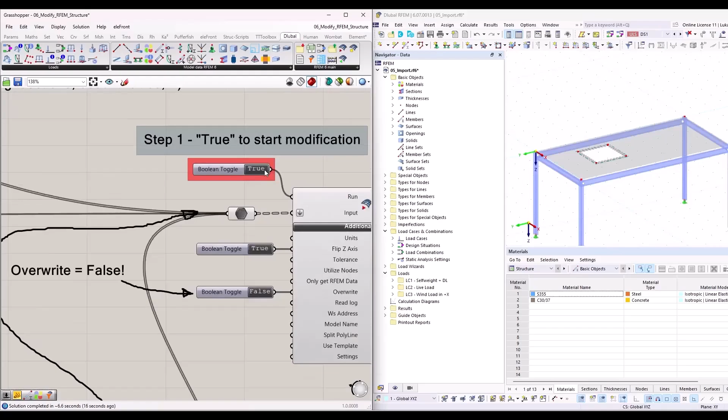Okay, that was the last sample file for today. As a little recap, for those who haven't seen it before or are interested, I wanted to show the capabilities of our Grasshopper plugin. You were able to see that we can export model data, load related data, the loading as well. We can run calculations, export results, import them again. In general, we have an import from RFEM into Grasshopper. So I think the main components are included, so you can cover the structural, analytical models that you do on a daily basis.